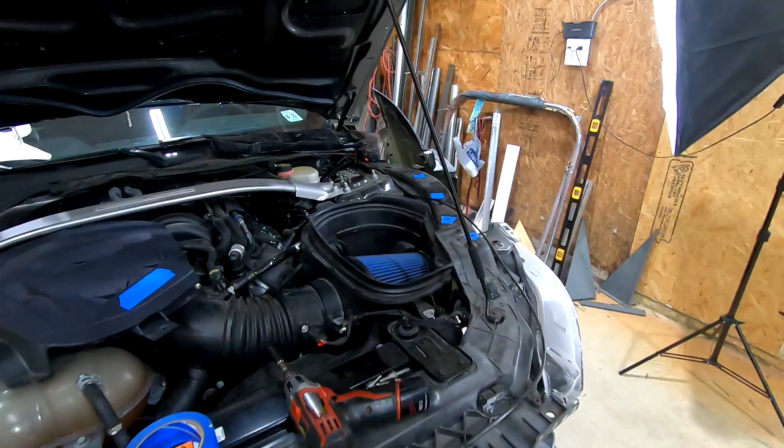In a previous video I showed you how I installed these louvers on the hood. Now when the hood closes, some of these louvers do open up into the airbox area.

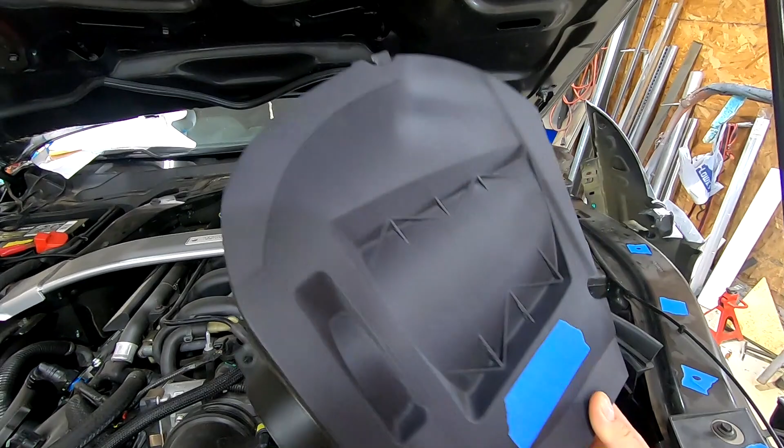So what we're going to do is go through all the steps to make a carbon fiber cover for this airbox. I was able to get my hands on one that another company made, but this thing's pretty rough, and not conducive to easily molding in any way. You can see all the overhangs and edges. If I were to use something like this, I'd have to cut that flange off and do so many modifications to make it moldable that this first option kind of just went out the window very quickly.

I would have to do so many modifications to it to make it my own anyways. That's one of the unwritten rules of composites: don't just rip off somebody's part, make it your own first. That's my only quick side note. So we're just ditching that whole thing.

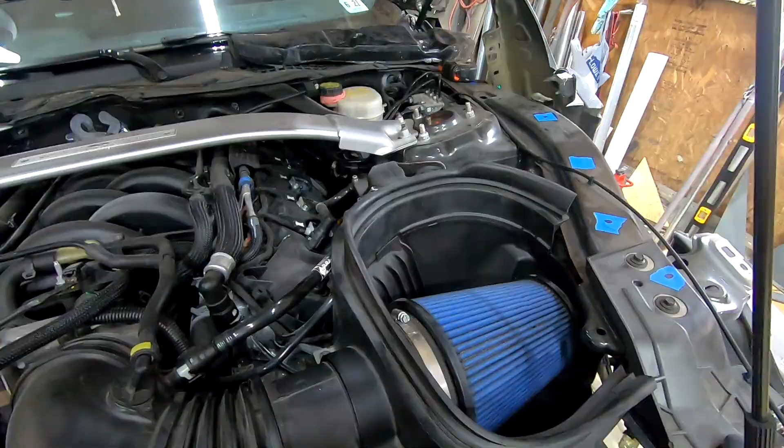So what we're going to end up doing is bust out our 3D scanner. I did a video on 3D scanning already. A bunch of the white spray is actually still on it, I think it's getting all over my pants and my shirt. We're going to scan this airbox, and we're going to scan this individual upper piece. We'll 3D scan the box.

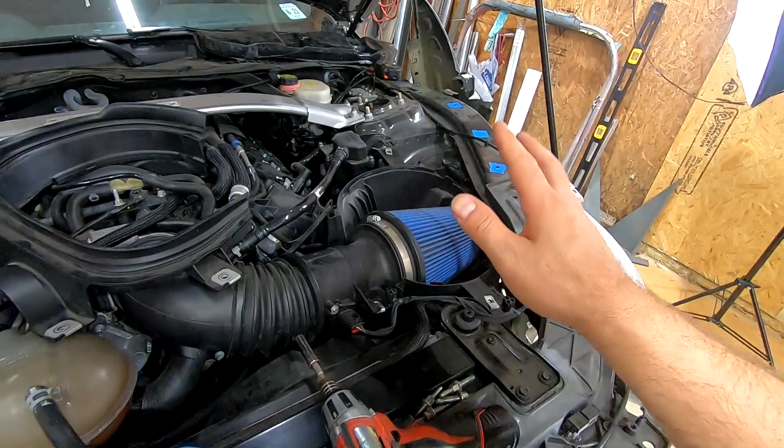Without this upper piece, and then 3D model our own, print it, mold that 3D print, and then make a carbon fiber part. So it's a lot of steps, but I think this will make a cool little part in the end that, if you have a GT350, will be available.

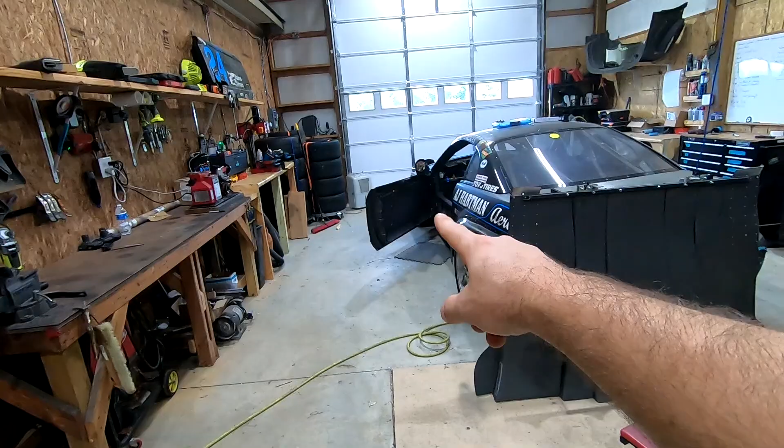Now a lot of people have been asking me about this. My carbon fiber videos have been doing really well. I made the door right there, I think it's actually my most viewed video. The fender flares, even our diffuser, I did a video on.

But a lot of people have been asking me about a video on how to make the molds. So this will be a little bit of a twofer, because it'll be a mold video of a 3D printed part. That should be pretty neat, so that'll be video 3. And video 4 will be a pretty standard carbon fiber layup, making the final part.

So now that I've laid out the rough plan, let's just go ahead and get the scanner out and start scanning all the parts that we need.

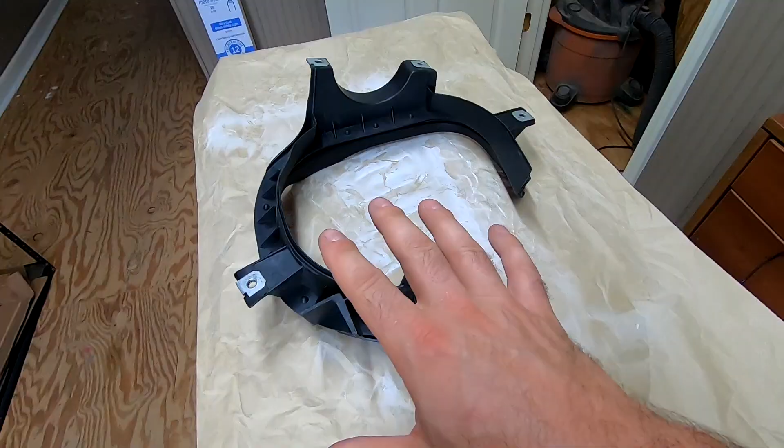Alright, so we're up in my office and I have the part on my scan table. There's something I figured out: if you crinkle up paper, these crinkles are actually features that the scanner will pick up. A lot of this white is just left over from other stuff I was scanning. The 3D scanner doesn't like black surfaces or shiny surfaces.

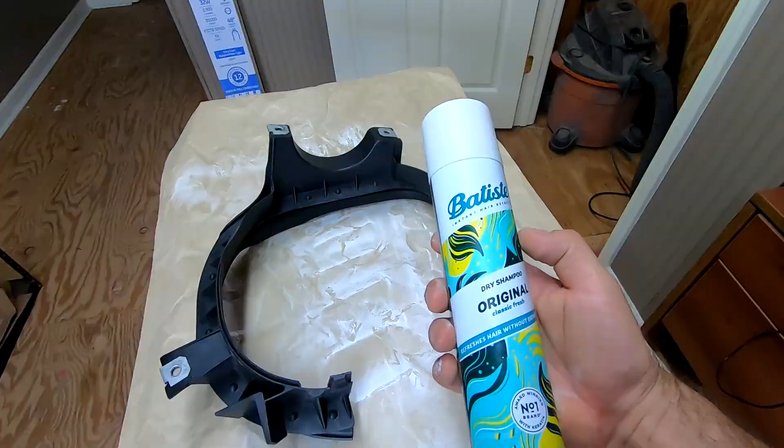So I'm going to start by spraying this with—I found this dry shampoo, works pretty good. They do make scan-specific spray, it's a little bit more expensive. This I was just able to pick up at the local Walmart, so that's why I got a couple cans of this.

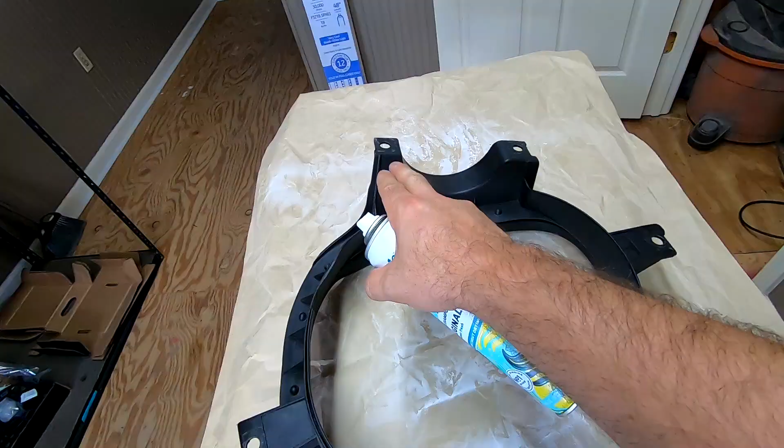So we'll start spraying it, scan it, flip it, and then just repeat the process. In post-processing, we can put the two scans together to end up with a part. Quick note, I did take the metal clips off because I didn't want to scan with those metal clips on.

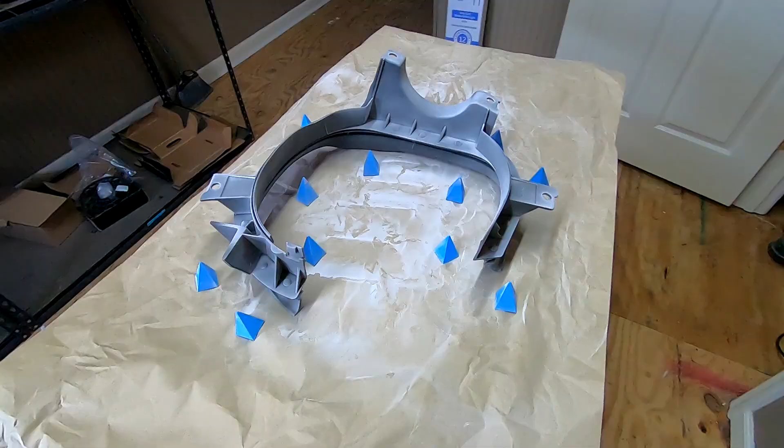Alright, so there you go, just enough to give it some color. I'm going to do the whole thing and then we'll come back with the scanning. Alright, so here we are, whole thing sprayed. I think we're ready to scan.

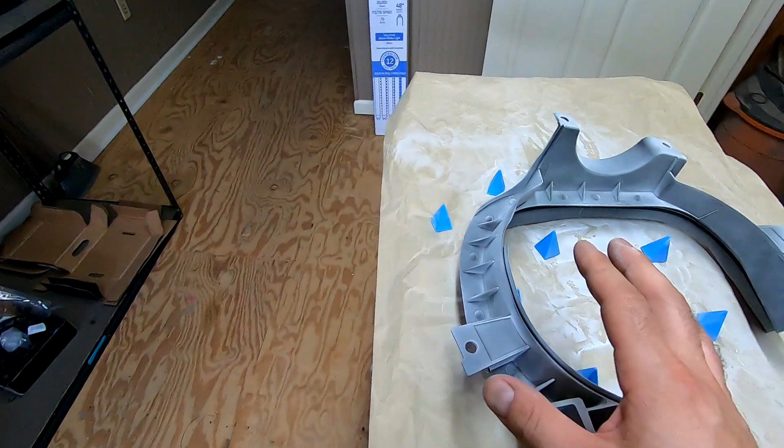The other note is these little parts are just 3D printed pyramids. Since I'm going to be doing a feature scan, there are a lot of features on this part that aren't repetitive, so we should be okay. But a lot of times it will lock onto these little pyramids and the part in a way that helps the scanner keep track and doesn't drift off, and you end up with a better scan with more little markers around it. All right, before we start scanning, I'll talk about my scanner really quick.

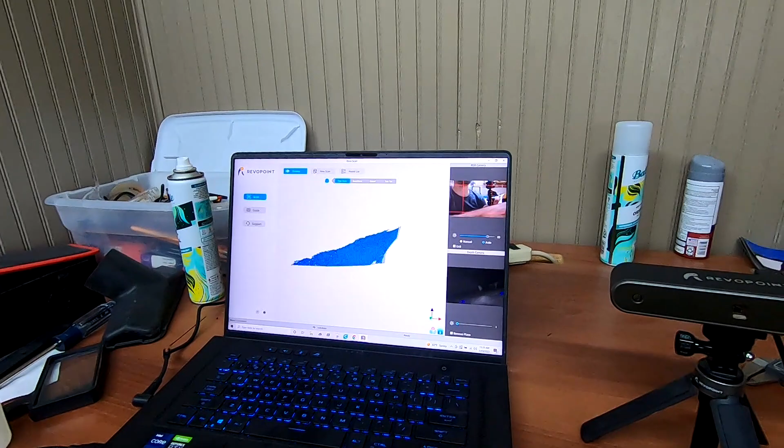So back to the scanner, you can see it comes with its own software. And actually right now the scanner is looking at me. So look, if I wanted to scan my hand, I technically could. That's kind of funny. So what we're gonna do is set up our new scan.

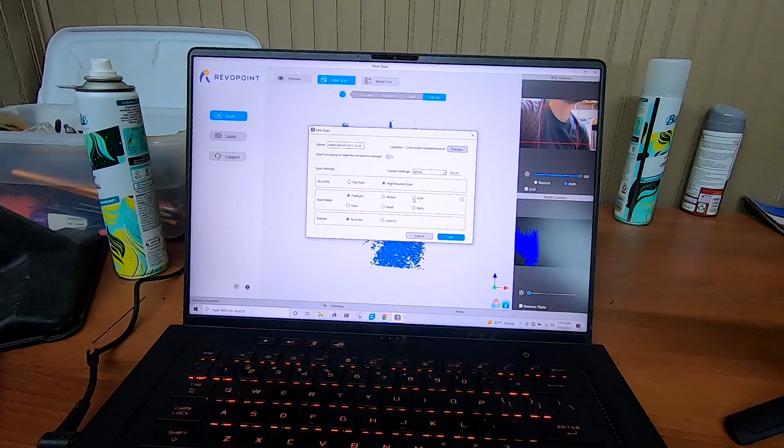I'm gonna do high accuracy. The last one I did was a head. Effectively these, they do tell you exactly what each one does. They do have a dark mode. We're gonna do this one with features because I think it will pay off doing it a little bit more accurately. If it doesn't work, we can switch to dark. But basically each one of these, a face scan gives you a little more scan area, head is even larger than that, and body gives you a large scan area. But the quality goes down with each one as well. So we're gonna try it with this.

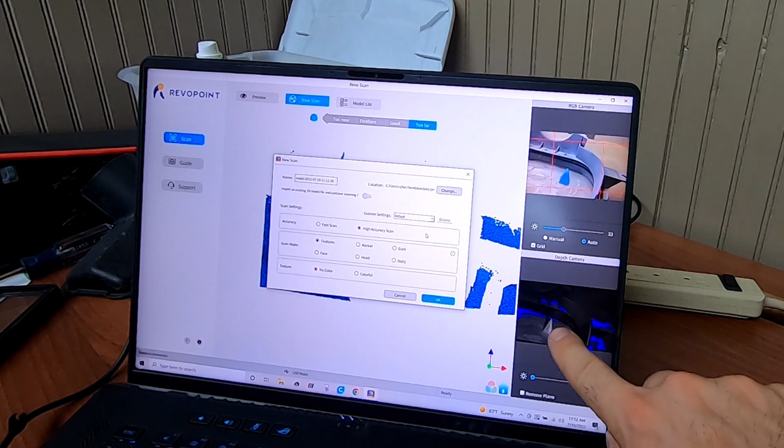First of all, what I'm gonna do is grab the scanner. I'm gonna hold it near the part like this. I'm looking down here in this bottom right one just to make sure I look okay actually. Let's do that.

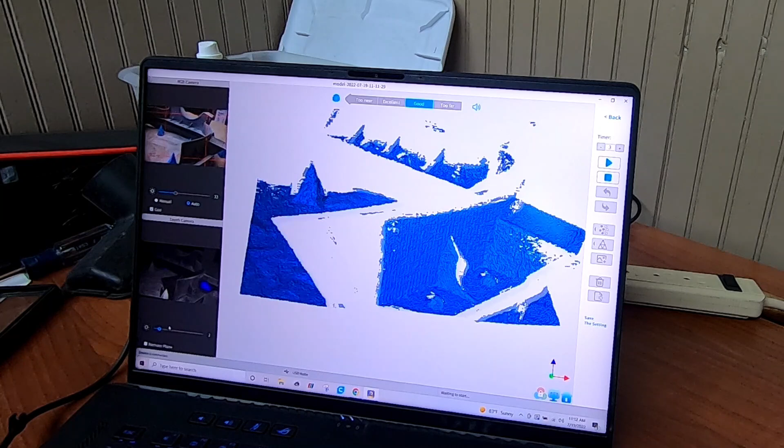All right, so at this point, where is my part? It's a little bit hard to see. You can adjust the settings. Oh, there you go, so just changing the brightness down here. See how much more we picked up of the part? Let's see, 3 even looks better. Now we're getting red, so we might be getting a little bit of overexposure. So I think 3 looks pretty good.

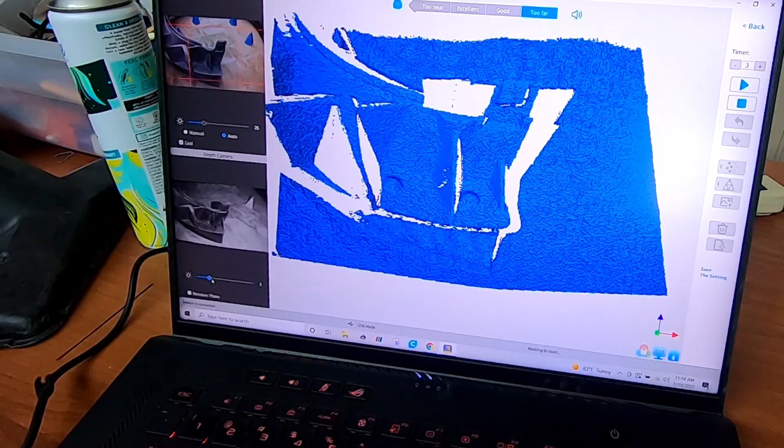All right, so at this point, we're ready to start our scan. I'll do a little bit of it at real speed so you can see, and then just time lapse through the rest of it because it is fairly slow and tedious at that point. So this will be real speed. Let's see, so we'll try and start over here. I'll hit the scan button from the scanner itself.

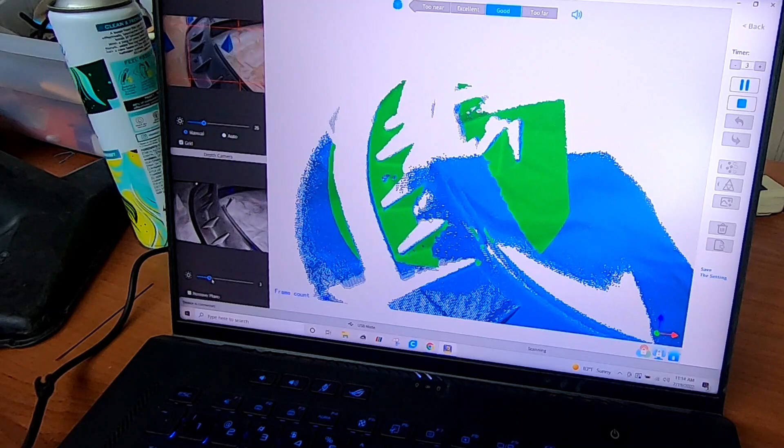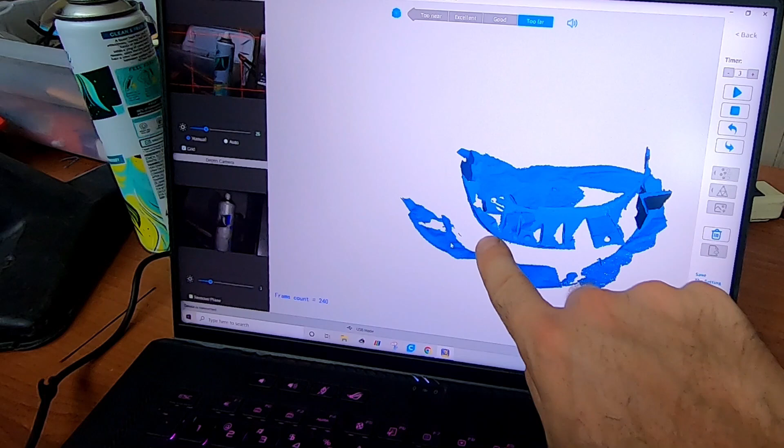Looks like it may have just jumped. Okay, we're getting it. So now what I can do is just re-pick up on one of these points and continue the scan, and the scanner should know where I'm at. So if we go back to somewhere in this area with these two little bumps and the ribs or something, it should be able to pick up the scan and keep going. So let's give that a shot. There, see how it just picked it up? And we can keep coming around. Oops.

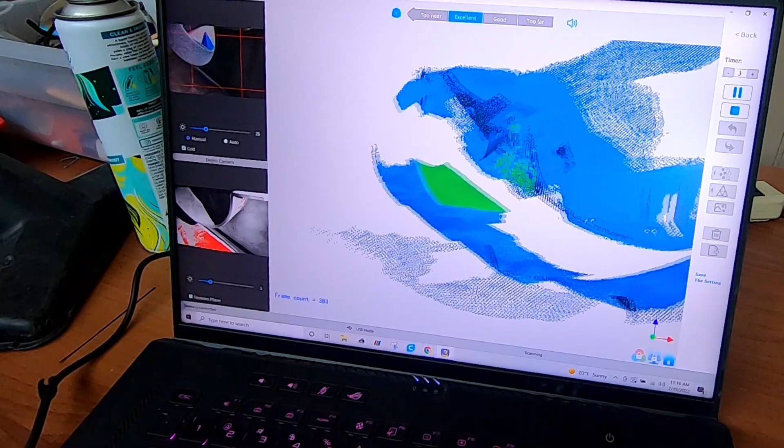I'm gonna try and get more underneath here. Repause it. Alright, so we're starting to fill in the point cloud somewhat. So we're getting there.

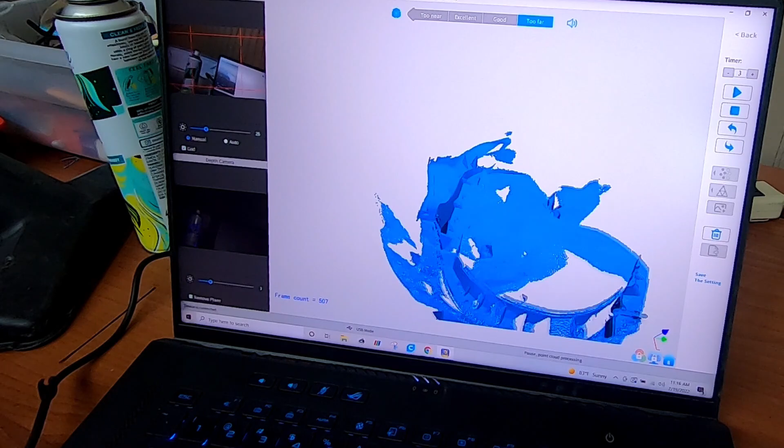All right, so you can see the point cloud is getting there. We didn't fuse the mesh or anything yet, or clean it up, so right now it just kind of looks a little bit messy, but we'll finish out the scan and I'll bring you back when that happens. I'll time lapse through it a little bit, but like I mentioned, it is a little bit tedious, and there's no sound in time lapse, and I really want to put my air conditioner back on because it's hot in here.

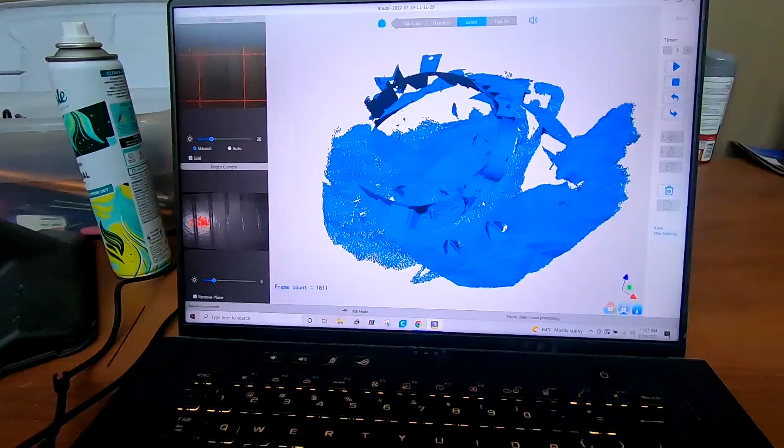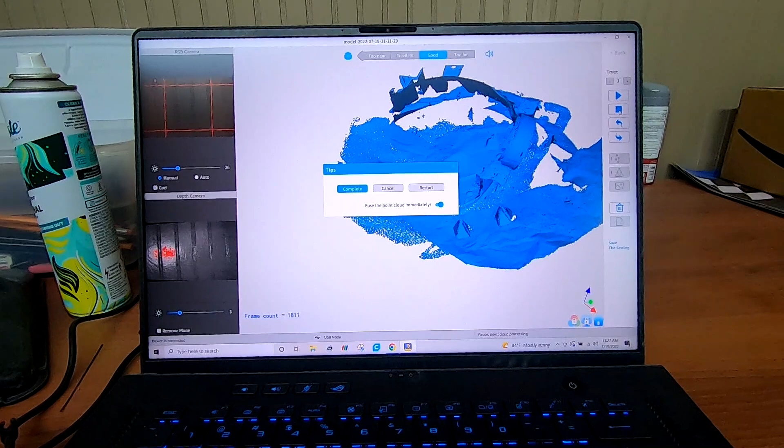All right, so here's my scan. Doesn't look like a whole lot right now, but I have the important parts, which are this bolt hole here, this bolt hole here, the curve, and the 2 bolt holes around the air filter area over here. So now what we're going to do is hit the stop button. I'll take that off so I can show you.

Manual, how accurate do you want it? 0.2 of a millimeter. We'll go with the most accurate, see what we get.

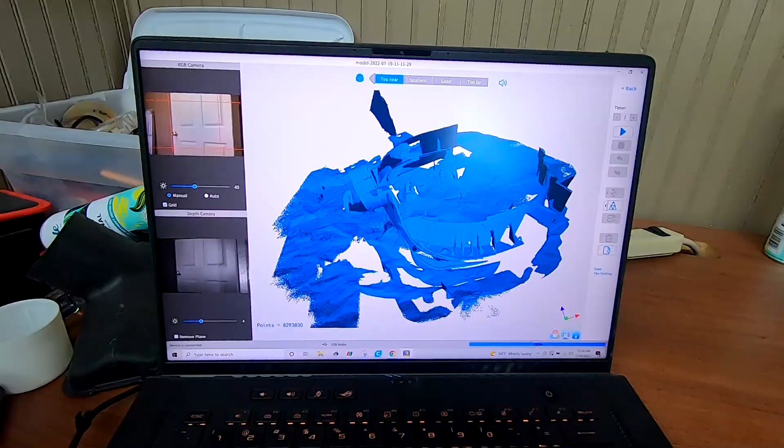So fuse the point cloud. It'll take a minute. So now that the point cloud is fused, you can see we have something that looks a lot more like a part, like we were shooting for.

Now, the important things I need are this mount hole down here, the 2 mount holes, and at least some of the face around this, and this additional mount hole over here.

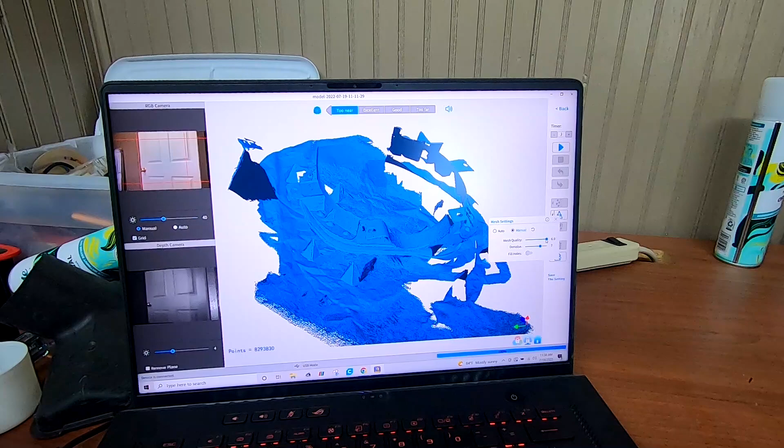So what we're gonna do now is mesh quality, denoise. We'll keep the settings kind of high. We'll come down just a tiny bit, save some time. And we will get our mesh.

All right, so the mesh scan is complete, and now you can see we have something that actually has some surfaces.

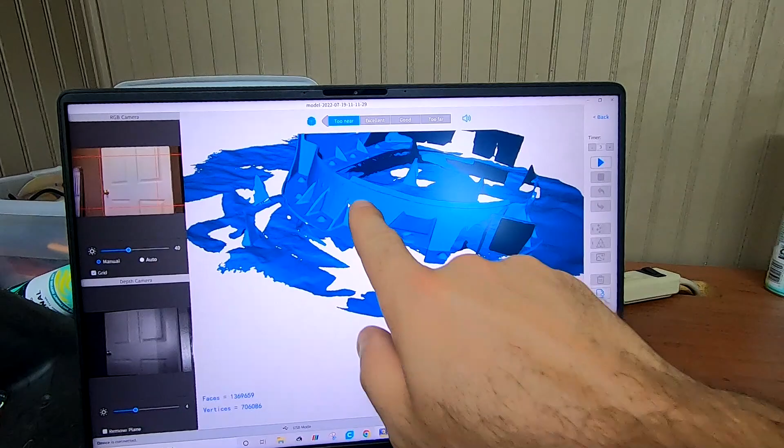Like I mentioned, kind of the important bits are, I might need to use this little ridge, because this little ridge right here slots into, we're upside down right now, but the bottom half of the airbox on the car. I think we have enough of this face to construct off of to build out our CAD model, and again, this mounting point here.

So what we're gonna do is export it and then bring it up in Revo Studio.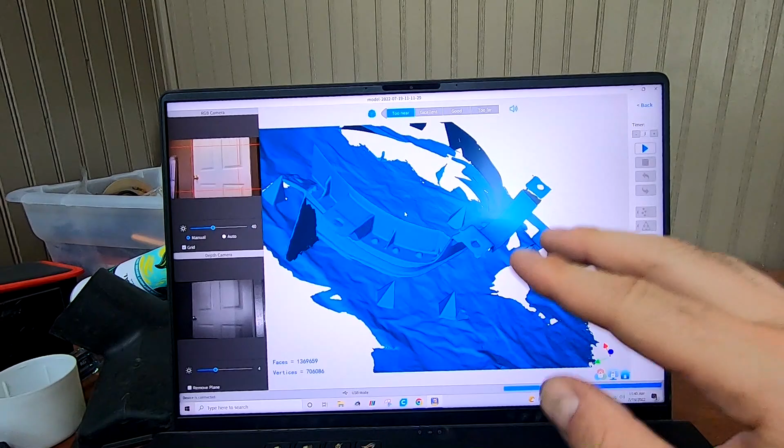All right guys, so here we are in Revo Studio. Now this software also comes with the scanner, so you don't gotta worry about any of this. It all just works together. At this point, we wanna cut away all the junk we don't need.

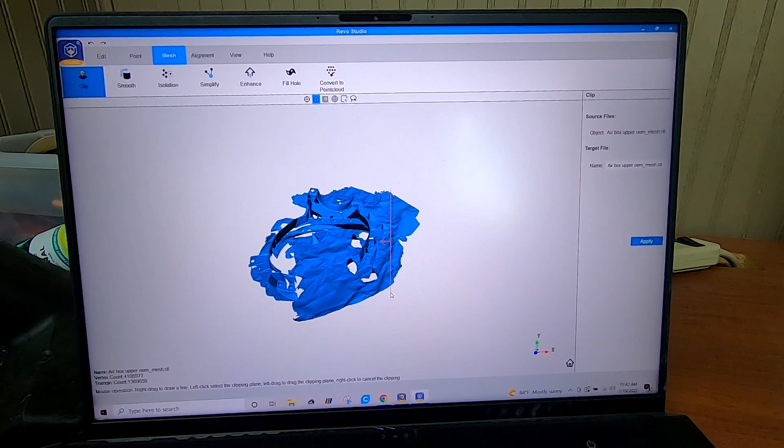So we'll go to clip. I always forget which way this goes. I think we keep the left. Yeah, there we go. And hit apply. So we'll do a couple big cuts real quick.

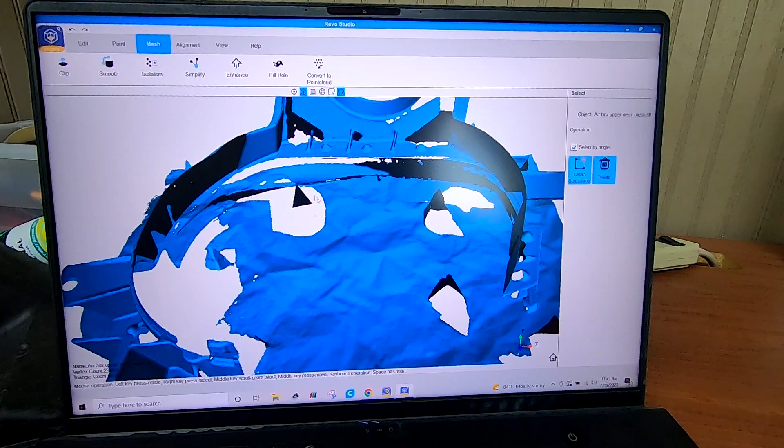And then say you need to get in there and get just a specific area. You can do a lasso cut. Now the reason that chunk is there is because that scan got picked up from this angle. That may be a setting in here. Not sure of that one yet. Would be nice to get rid of all of it in one shot.

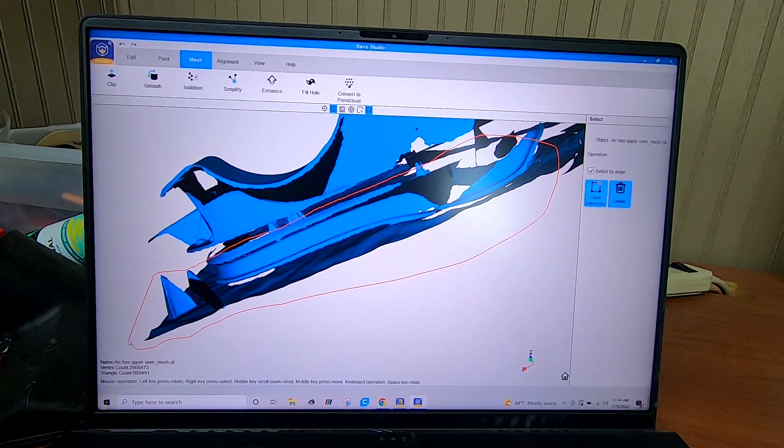All down here is the rubber seal from the OEM airbox, so we kind of don't need it. So we could just do like a huge cut. Something like that. And you can see how once you start cutting away all that stuff you don't need or don't want on your scan, you'll eventually be left with just the piece that you need.

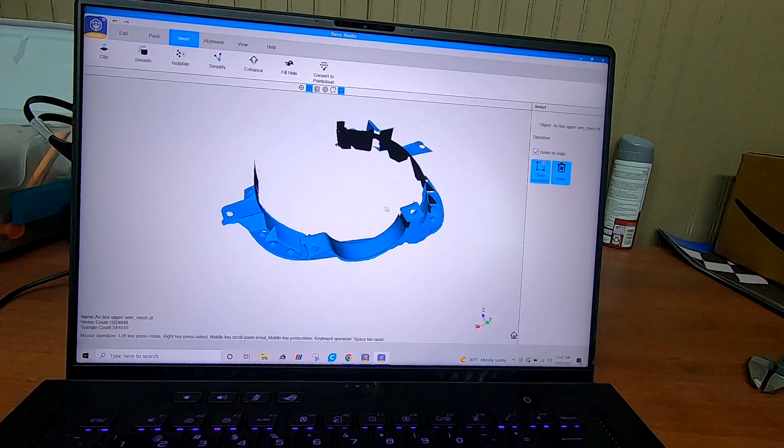All right, so after just a little bit of cutting, trimming, you can see we have basically our finished part that we want. So then from this point, we can export this and model from it or off of it or do whatever we need to at that point.

All right, so at this point, like I mentioned earlier, it does get a little bit tedious and time consuming. So I'm gonna go downstairs. It will be pretty much the same exact setup as this. Spray everything. I might have to do that one in dark mode, but generally the same exact steps, and get it all onto the computer, and then we'll pick up from there.

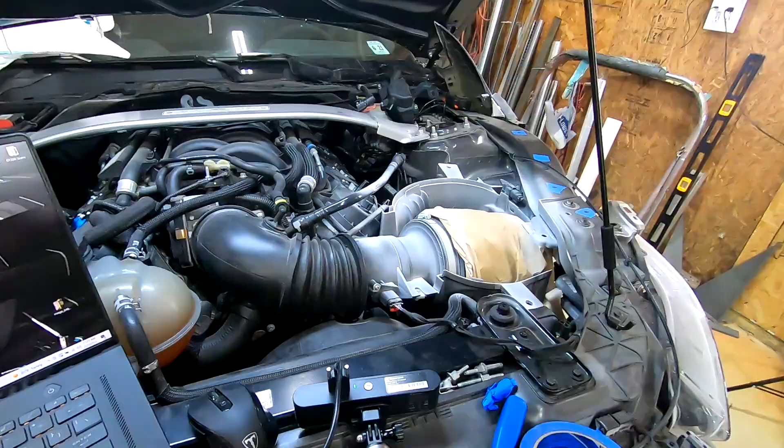All right guys, so real quick, here's the setup on the car. I put a brown bag over the filter because the ridges in the filter are so similar, it could lose track scanning it. This is very tightly to the filter, so when I get my scan and I model it, as long as we clear this, we know we're good. Again, you can see that I sprayed the dry shampoo around everything that matters, and even a little bit past it, because we're going to need to know where this part of the frame is to make sure we clear that and everything.

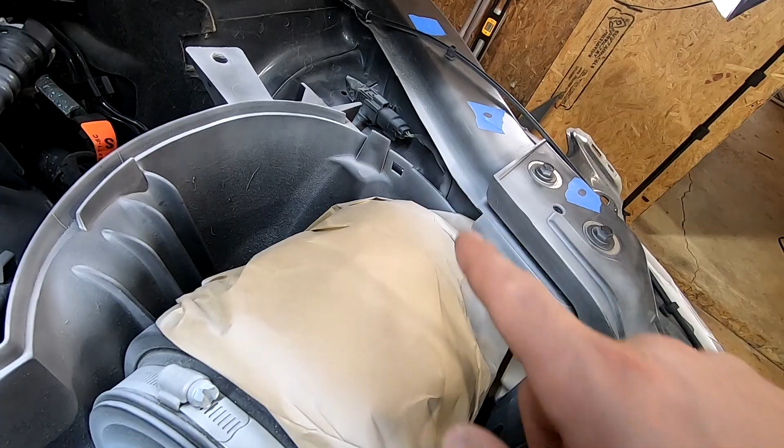Just like upstairs, spray everything white. There should be enough detail where I shouldn't lose track. So what we're gonna do now is a little bit at real speed with the scanner. When I was starting this, it would have been helpful to see people do some of this in real time. Then we'll jump towards the end since it's just like upstairs. Once you scan everything, you might have to do a couple scans and stitch them together to get your final scan.

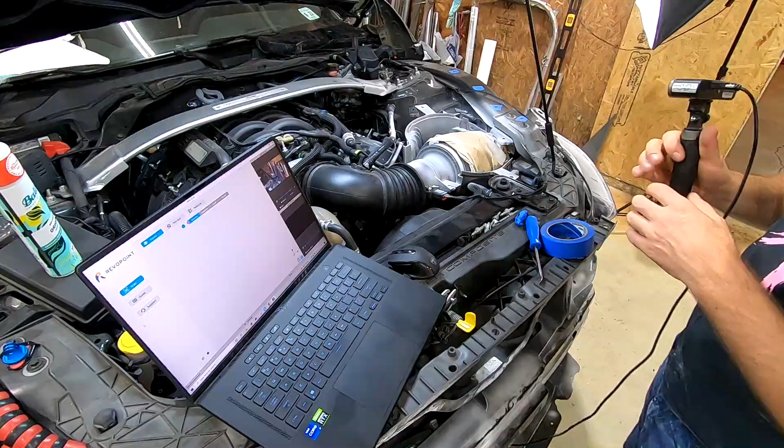So just like upstairs, there's going to be a whole new scan, high accuracy and features. I think we should be good.

Now what I'm going to do is pick a corner with a lot of detail, like this little notch, and that'll be my start. I'll do one scan coming this way, re-pick up here, come out to here and around, I think that's what will work for me.

I'm going to adjust the light setting. A little bit hard to do left-handed. I think that looks pretty good. So let's start our scan.

There's that mounting tab I definitely want to keep track of. Getting too far. There we go. The scan's going good, so... Come on, there we go. There's that other mounting tab we need to keep track of. That little rim.

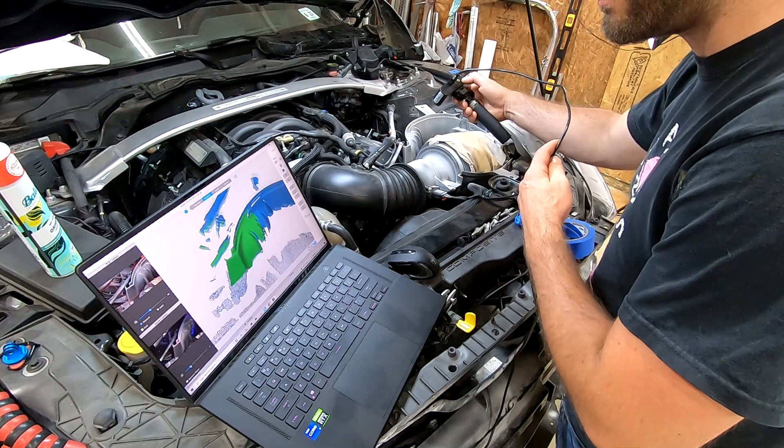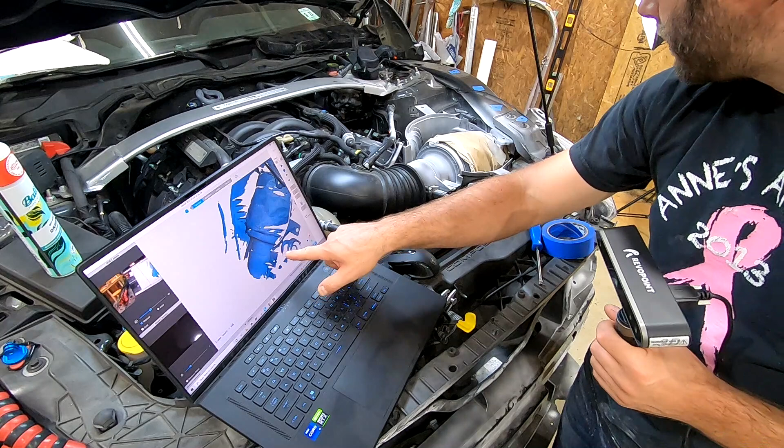So it jumped a tiny bit right at the end, so I'm going to go back just a few frames. There we go. This is kind of hard to do with the trackpad. So there's our mounting tab, the other mounting location.

You can see we're getting some misalignment on this back one, I think you can see that. So let me go back a few frames. It doesn't look too bad.

I lost the mounting hole. If you look, I have the mounting hole on this one right here, but for whatever reason when it's scanned up here, maybe because it's dark underneath. So what we're going to try is just put a piece of tape under it, so now it might pick that up as a hole. I'm just going to hit the back button. Oh, there we go.

Okay, let's go from there. Because now we have the hole, and if I go forward a frame, it jumped for whatever reason and gave me a weird tab. There we go. So now we're going to try and pick up on this corner right here and go this way up over the top and see if it keeps track.

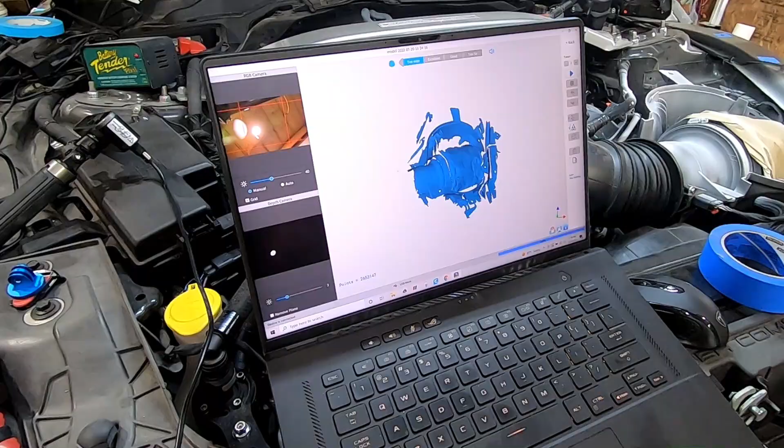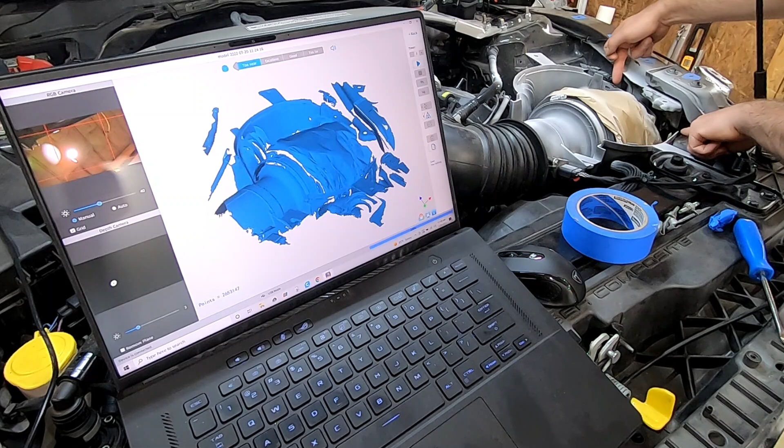Alright, so now that the point cloud is fused, you can see how it looks. Looks pretty good. I think one area that was extremely hard to scan was all the way back under here, but I have this point and this edge, so when I 3D model it, there's a straight plane between the two. So right up here is where we're missing maybe a tiny bit of data, but I think that's fine.

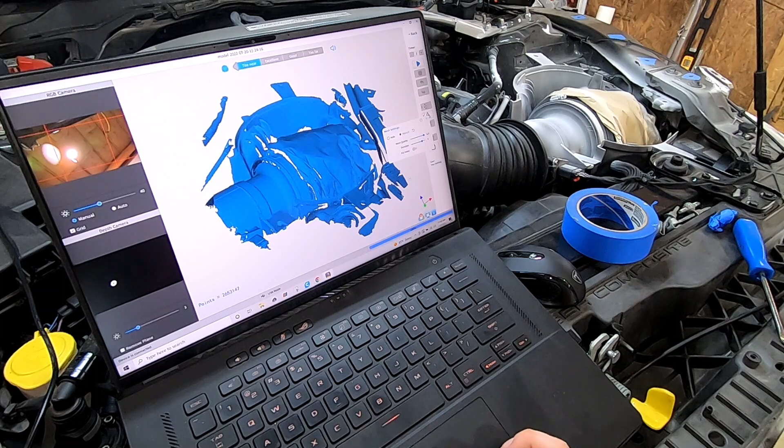Now, mesh quality - I kind of want this to be as accurate as possible. Denoise kind of smooths out any weird bits you might have. And now it will generate a mesh out of all this.

Alright, so now that the meshing is done, you can see we have a nice, pretty good, smooth part to work from. All of the important points are noted on the model. So our mounting hole right there and there. How we're going to build our CAD model, we don't know, but that's where video 2 is going to come in.